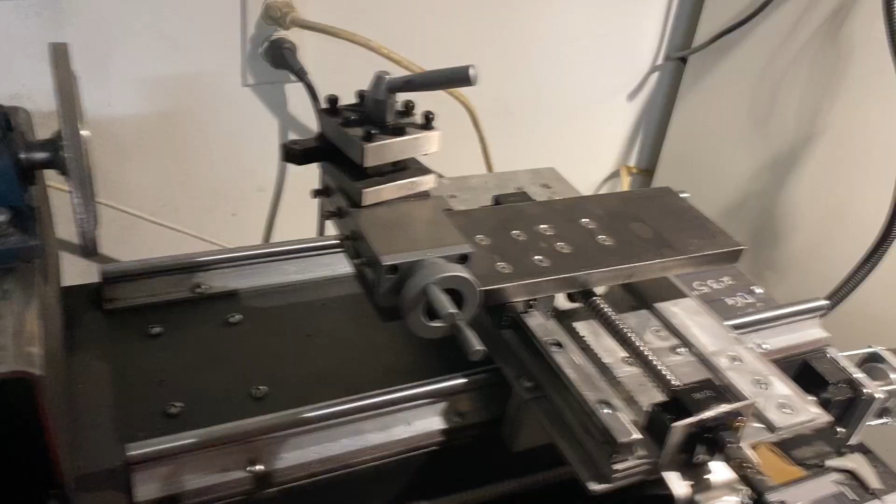Now, I'm also going to go over the components of the lathe just because I haven't done that before, so everybody can see what I've already done on it. Let's go ahead and switch this around so I can actually show everything related to the lathe.

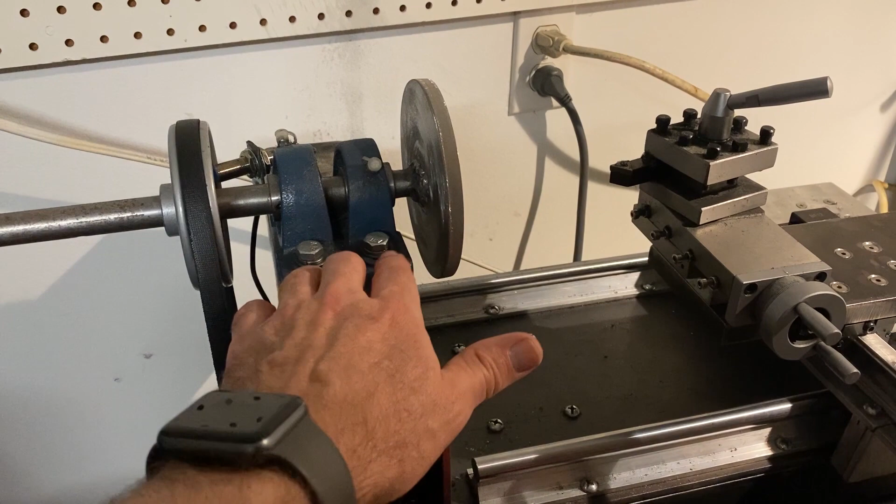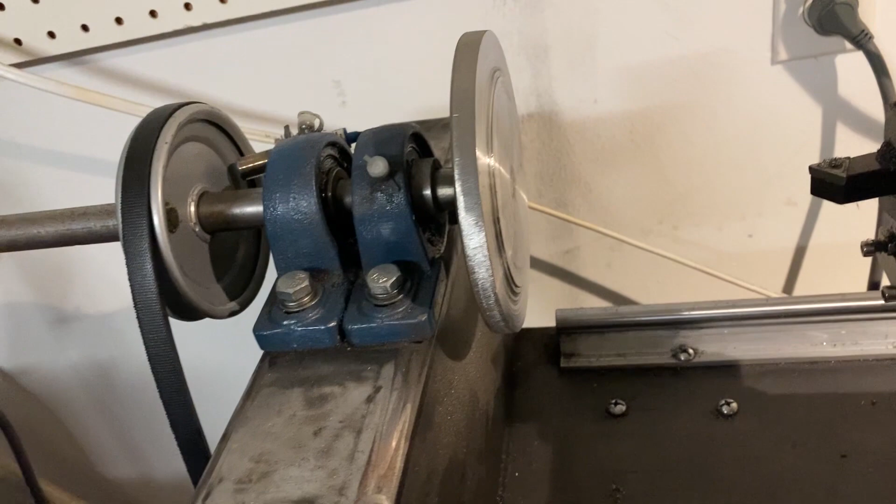So I've got the headstock here that I built, and I just used a piece of rectangular steel tube to put that on, along with two bushing bearings that are parallel to each other, a 3/4 inch rod, a pulley, and then a 5-inch disc that I'm still shaping into the back plate. I'm almost done with it though. I just stopped to work on the stuff related to the automation for the CNC.

So this was the first bracket I made. I'm actually going to replace this one. This one works okay, but it moves around a lot, and I like the other design better. So I'm going to go ahead and knock out two of the new design, which I'm about to show you guys, and we will go from there.

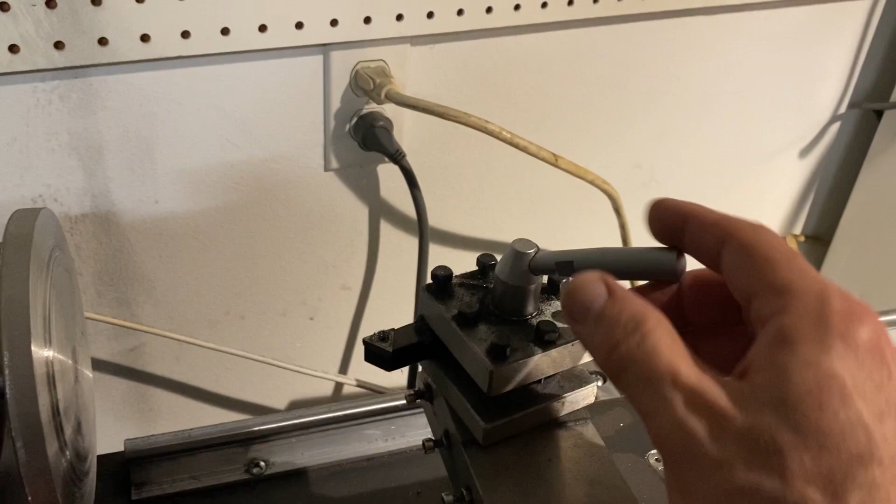And then as far as the top part goes, I bought the cross slide for the tool holder, but everything else I made on here. I just used a piece of plate steel, cold rolled, for this. I still need to finish it, so it's all going to come off and get painted. And then I used aluminum for my bottom sled, which obviously doesn't have to be painted.

The interesting thing is these rails here weren't the same height as the screw drive, even though I bought them in the same kit. So I ended up having to shim this up a couple pieces, which I did with some bar aluminum. Now, aluminum's not cheap, so getting something that actually fits would be better. But in this case, I didn't want to figure out what to do differently, so I just used some bar aluminum and shimmed it.

And then this side, I did the same thing to it. I didn't shim anything up, but I needed this extra piece put on here. This wasn't long enough when I first finished it up. I needed this extra piece so I could connect into the screw drive. So this was a mistake I made early on in design. I was able to fix it by putting a cantilever piece out that's screwed in. It's held on pretty darn well, held on by this piece and by these two pieces over here, and also supported by this huge steel bar that's right here as well. So I don't anticipate I'll ever run into issues with that.

It's all running on a sled that runs 24 inches long on these rails, and I got all this on Amazon. Later, when I post the overall video, I'll post all my parts list as well as what I purchased and how much it all costs. I don't know exactly how much it all was off the top of my head. It wasn't cheap, but it wasn't super expensive either, way less than buying one.

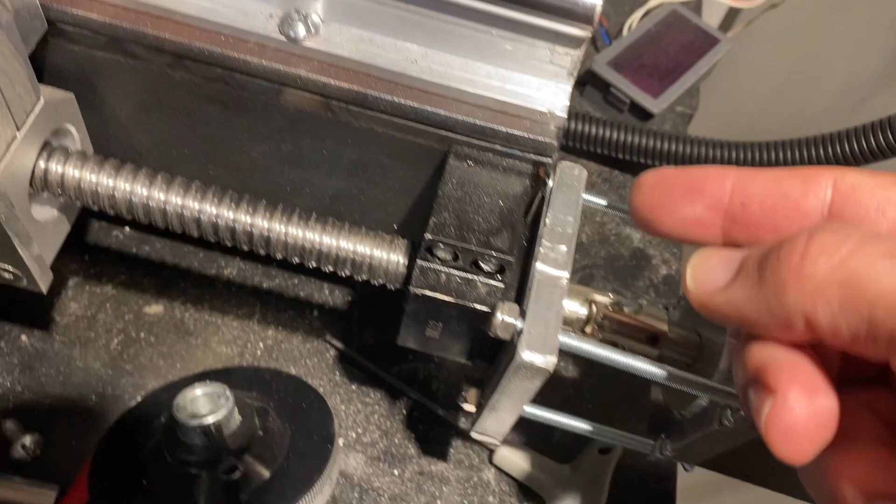So what I'm working on is this right here. This is obviously not going to work the way it is right here, but what I'm working on is this piece right here. I fabricated this piece yesterday. I originally made it in Adobe Illustrator and then used an Illustrator to G-code program to move it over. But this piece right here isn't going to work because there's not enough clearance here. So I'm actually going to make another one of these for this side, move this one over here, and this one is fine the way it is for over here. But for over here, it needs to be self-tapping because there's no clearance to work with, whereas on the other side, I have plenty of clearance to work with.

So this will move over to here, and then I'll build a new one of these using my mill. As you can see, there's a total of 8 holes in this, 9 actually if you include the center hole. Getting all these in here precision-wise without using some type of program isn't impossible, but my skill set is low, and using automated equipment such as CNC makes it easier for me.

Originally trying to figure out what I'm going to mount this to was one of the things, but inside of the screw drives there's a little bracket, and I made a drawing of it. It's a little square with 4 screws in the middle using M4 screws, so I used that as the mounting mechanism. But to do that, I have to create a pocket for that square to go into the aluminum I'm cutting.

I'm using half-inch aluminum square that I'm going to make into a square, and that needs a total of 9 holes put in it - 1 in the center, 4 around for the pocket, and then 4 for the actual NEMA 23 motor mount. So this is what it looks like in Adobe Illustrator.

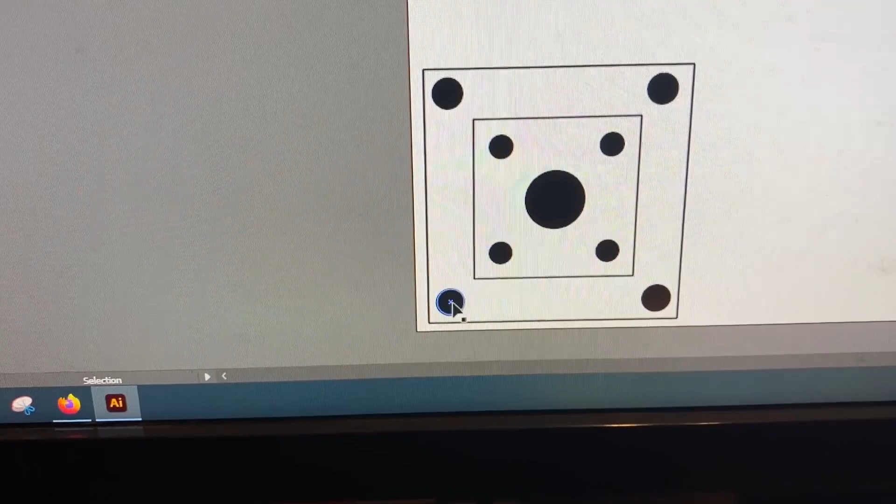So here it is in Adobe Illustrator. Not very interesting to just look at, so I'm going to go over quickly how I did it. It's a 60 millimeter square here, and these are centered on the edges. What I did originally is I made a box, another box, another box, and then a circle for the square. I'm not going to do exactly everything again, but just briefly.

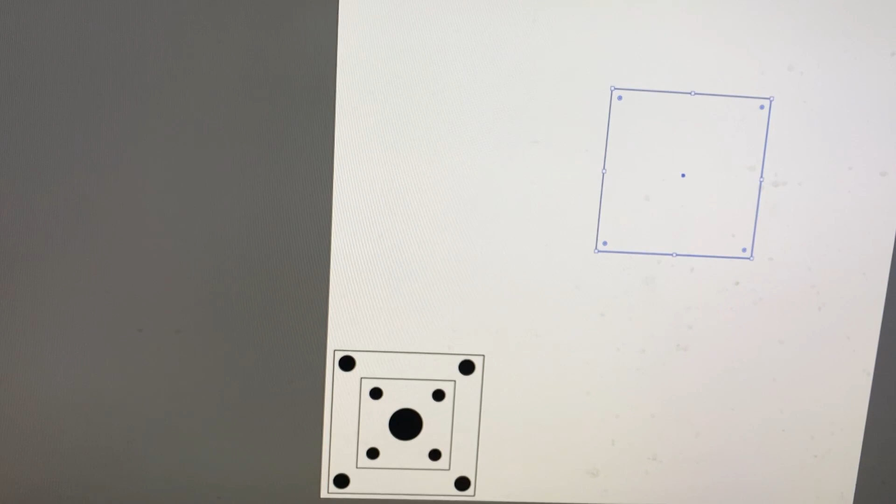When you take the square tool and click, it asks you how big you want it, and you can type in anything you want there. So if you want a 60 millimeter square, you just type in 60 millimeters by 60 millimeters, and it makes the box. As you can see here, if I grab the tool and bring this over, this box is 60 millimeters, or just under that - it looks like maybe 58 millimeters.

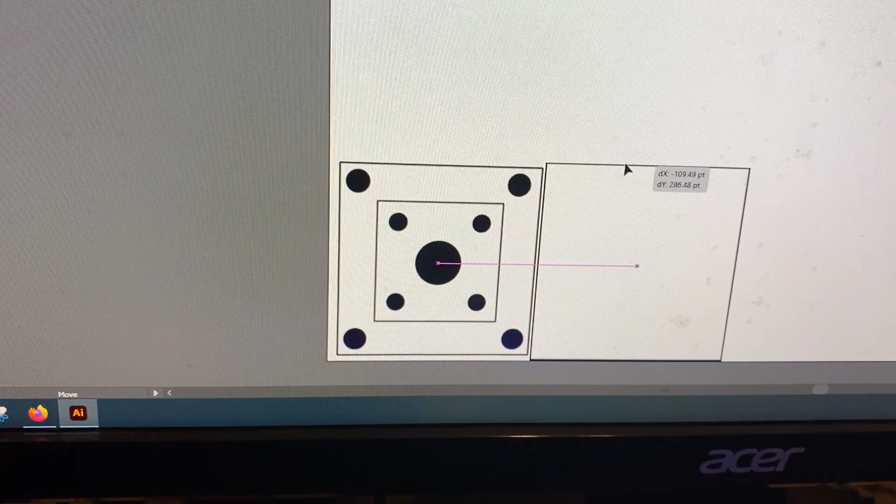But as it ends up, I need to actually make the box a little bigger on the next build, because the tool width - this is the outer dimension I need for the bracket or plate I'm building. When the tool comes in and cuts this, it actually cuts it too small, and I need it to be a little bigger. So I'm going to make it 64 millimeters - I'm not going to use this piece at all.

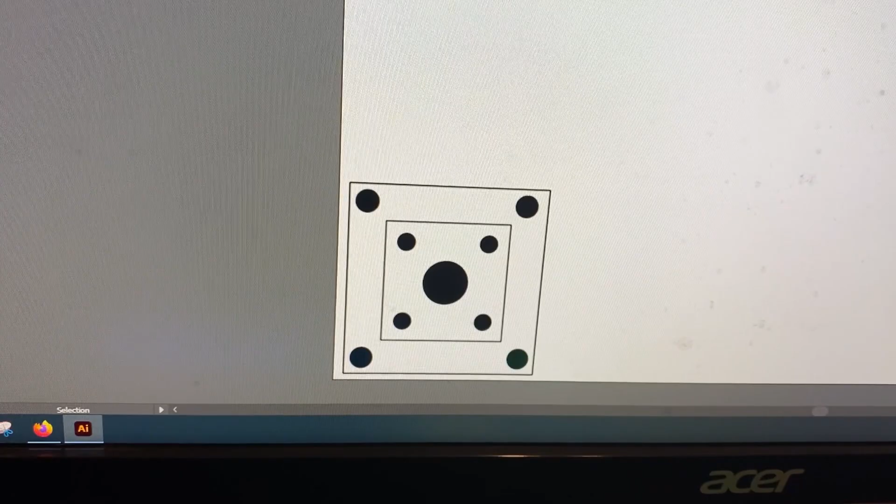I'm going to hit the box again and tell it to do a 64 millimeter - let's try that again - 64 millimeter by 64 millimeter. And then I'm going to take this and center it on that.

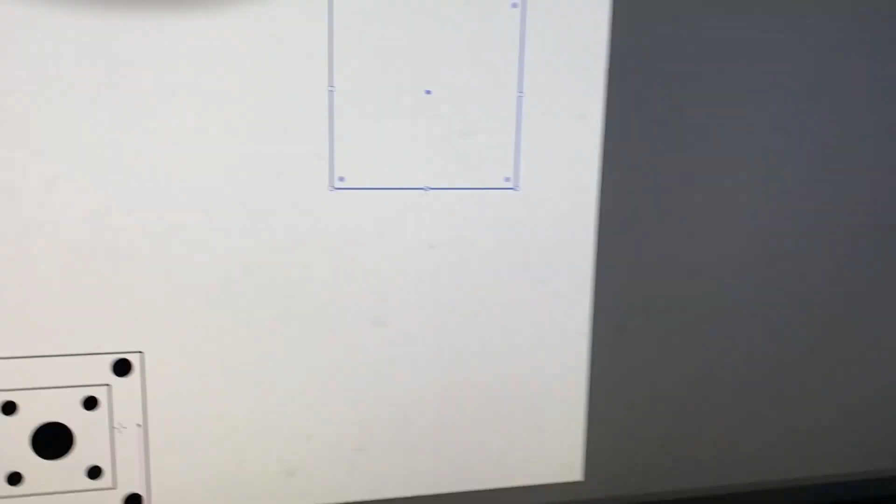Now, I'm not getting these holes cut completely for me - all it's doing is a scratch pass on this, getting all these holes marked. Then I'm going back with my drill press and actually drilling them. So I use the CNC machine to center them and not drill through completely, but then use a drill to finish them out on all of them, except for this one here, which I just used a half-inch 2-flute end mill to take.

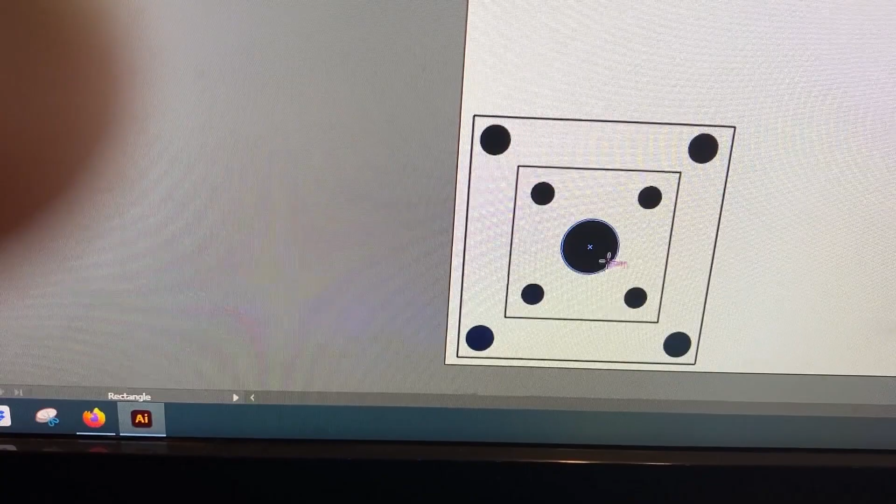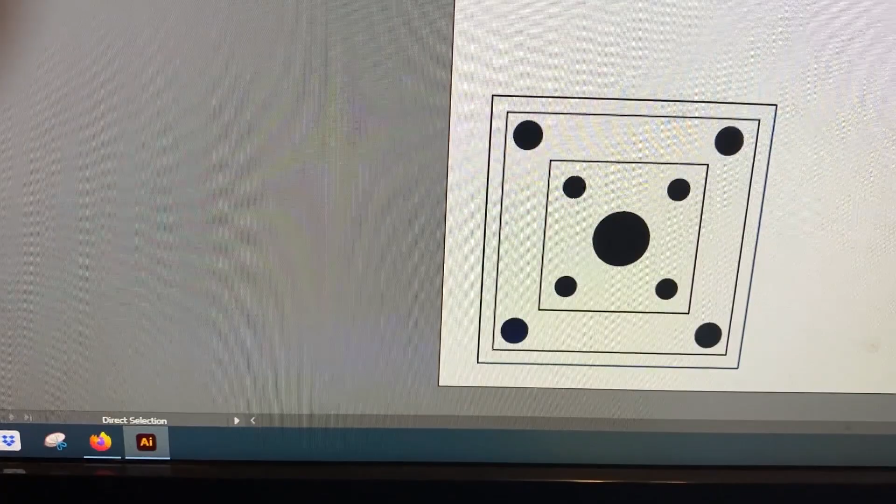So what I'm going to do here is just move this slightly over, and I do that by selecting it and holding down the arrow keys. I don't need to move it much. Then I'm going to take this one up here and move it down, and it's going to cover it up because of how Illustrator works. But I'm just going to go to transform, arrange - I'm sorry - and say send it to back. Now it's in the very back of everything, and it looks like I put it right dead in the center where it needs to be.

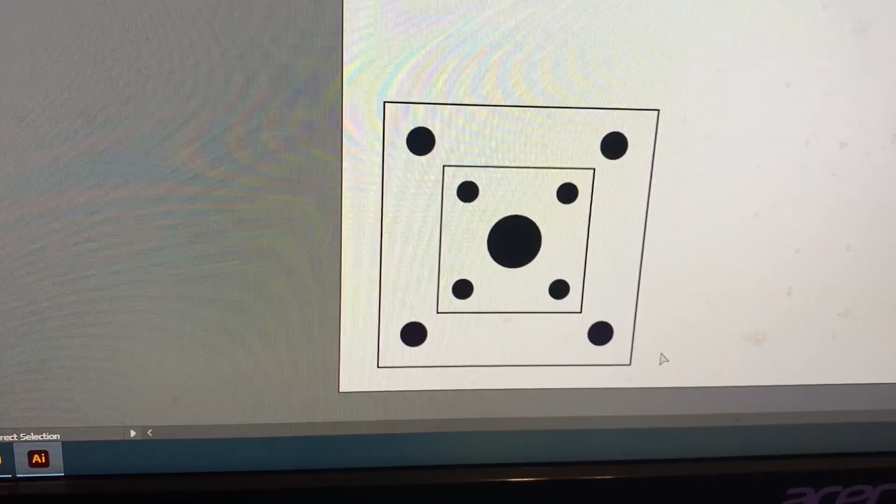So now I need to get rid of this one, because I don't want it to make that line on the CNC. So just by selecting it and erasing it, I can do that. Now when this comes in and cuts, my tool width can be up to about 6 millimeters bigger than the actual width of it. The size of this is not super important - if it's 60 millimeters or 62 millimeters or 59 millimeters, it's fine.

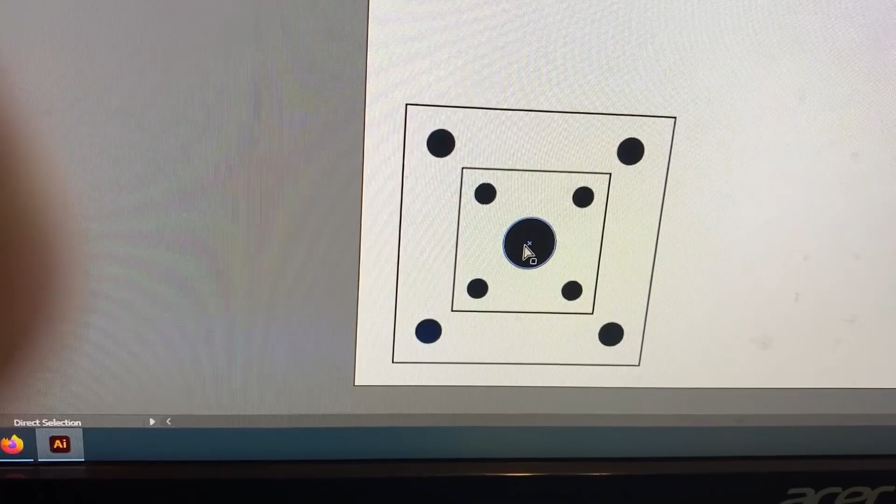The main thing is that these holes have to be in the exact right place, otherwise the motor's not going to mount. And these have to be in the right place, otherwise those holes aren't going to match where they need to be. And this needs to be in the right place, otherwise it's not going to allow enough room for the screw drive to get through.

Okay, so I'm using a script for this, and so for the script, I'm just going to come down here to scripts, and I'm going to go export to GCODE version 5. It just comes up with a screen here, and it basically asks you what you want it to do.

Now, I had the feed rate for the tool at 20 and the seek rate at 200. And what I found is that some of the cutting is going at 200. So what I'm going to do is 50 works for both just fine. And so I'm going to change both of those to 50 and call it even.

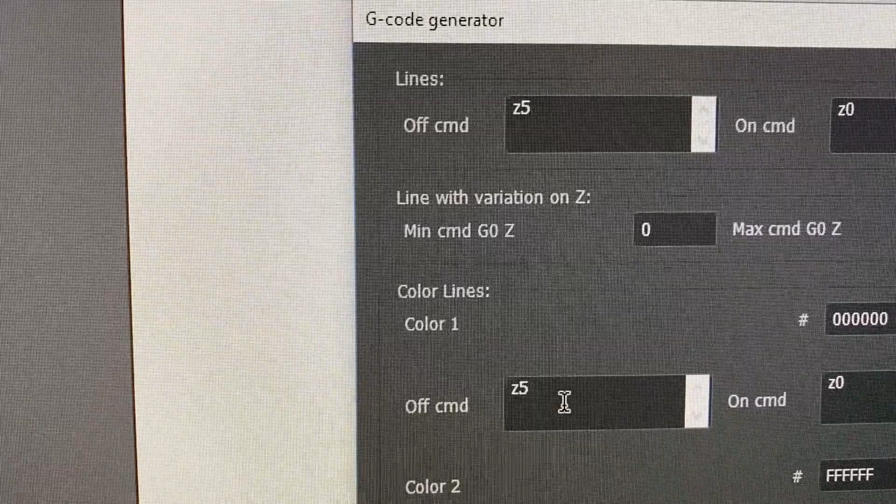I'm going to go ahead and save those settings, and that's what we're going to do there. And then as far as the G-code off and on commands, I have those as 5 and 0, and so that's where we're going to set those.

Now you have to put colors in for this. Obviously I don't have any colors, but I used 0 and F, and then I made up a third color. And then you just hit generate G-code, and then it'll generate the code. Oh, it's done actually. That was pretty quick, and it's in a test folder.

So let's go to that, and let's see what we got here. Yep, it's the third one here, and I want to open that with a text editor. WordPad's fine. And you can see here it generated the G-code for me. Anyway, so we'll run this.

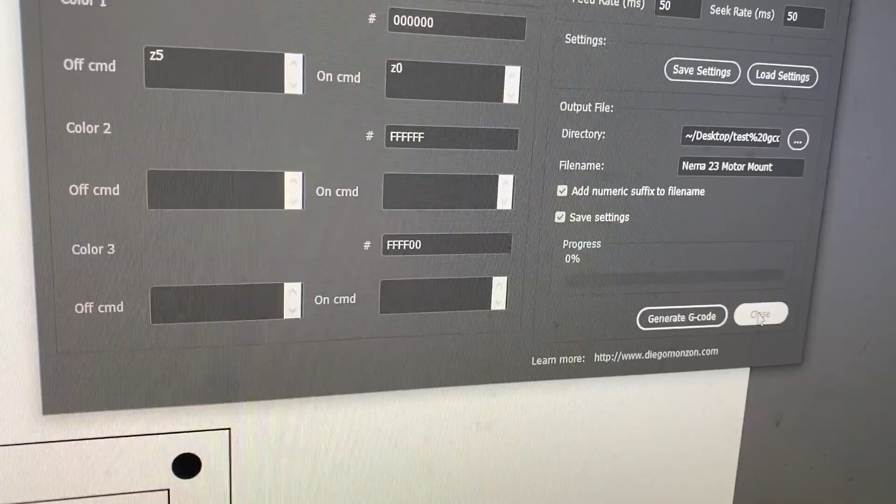Now, one of the things I do like to do with these files is go ahead and try them out on a simulator, and there's plenty available online to do that with. But if you just search G-code simulator, and the one I've been using is this one here.

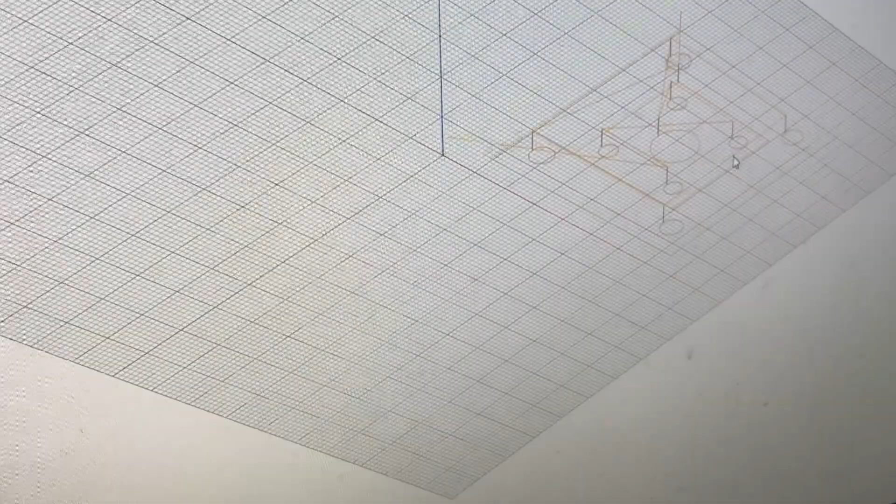I like the way it works. It's easy to use. You just come up here and click the open on it. You go to your test G-code file and go to the NEMA 23 motor mount 3, which is the one I just did. And you can see here when you zoom out, it's got it set up right here on the edge. Now, it's hard to see, but it's there.

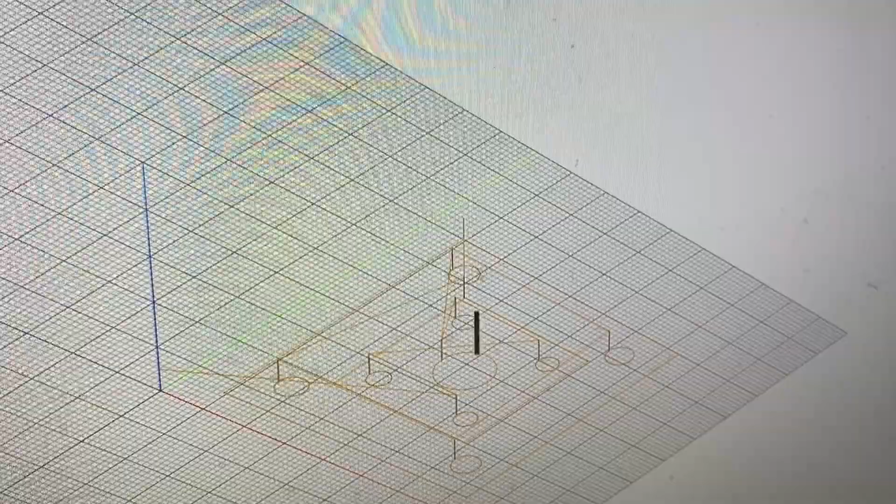And then you can just come over here and click the play button, and it's going to walk through it. And so it goes through everything. So just by watching this run, you can see that it's going to cut the job out on the CNC machine just fine. And so that is done. It takes way longer to actually cut it into metal, but we know it's going to work because of that.

So here I am in the workshop, and I'm getting ready to start off on building the piece on the CNC machine. So inevitably, when I designed this, I originally tried to make this where I could get 2 of these out of this one sheet. And I was hoping I could do that, but I couldn't actually get that. I ended up with this leftover, which, as you can see, is less than half of that's available.

So I'll have to save this, obviously. It's still an expensive piece of aluminum, it's 1/2 inch, and there's probably something I can make out of it later. I just don't have anything to make out of it right now. So that's one of the things that was a little bit frustrating when I designed this. I was hoping to get 2 out of it, just based on the size and measurements that I was going to need. But I underestimated that, and that was not the case. I couldn't get that out.

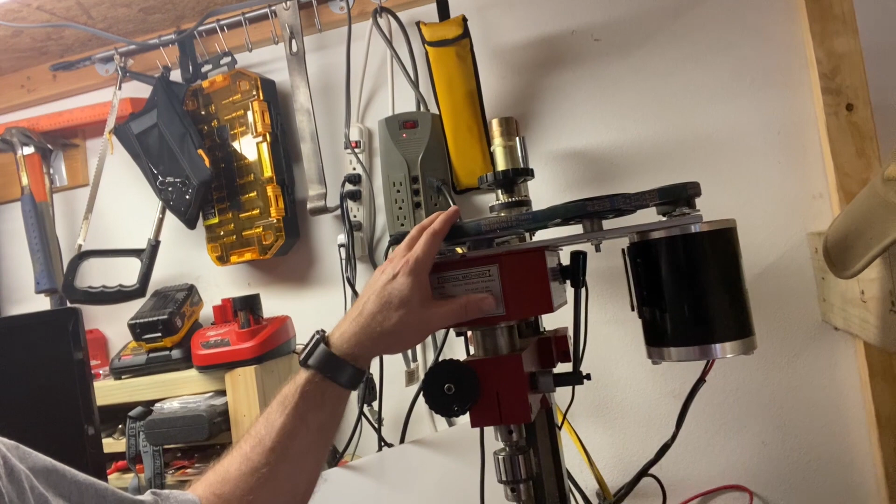So we're going to be using the CNC machine to do this with. And so what's interesting about this is a Harbor Freight mini mill. And I've upgraded this - there's a video on what I did here. But I basically thought I didn't have enough power, so I went and upgraded to a 3/4 horsepower motor, about 500 watts. And it's been amazingly better.

Right now I've got a little 1/2 inch 2-flute end mill on that. I need to take that out, and I'm going to put in a 1/8 inch end mill for the cutting we're about to do.

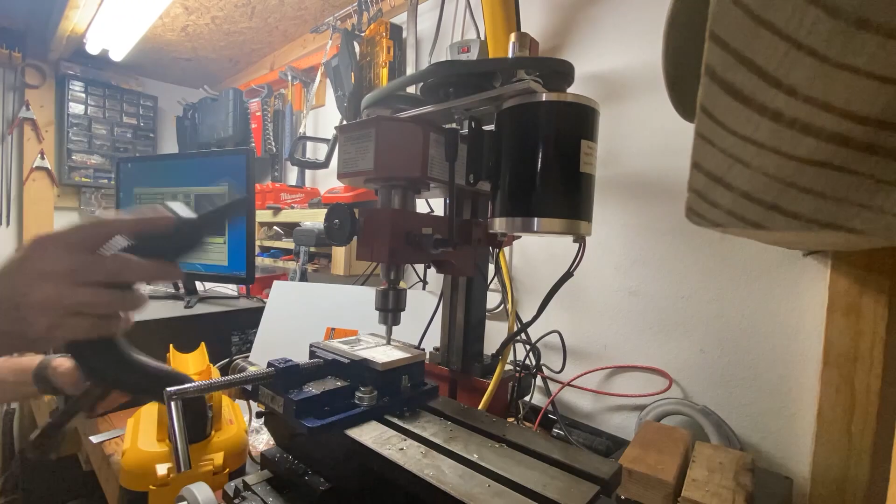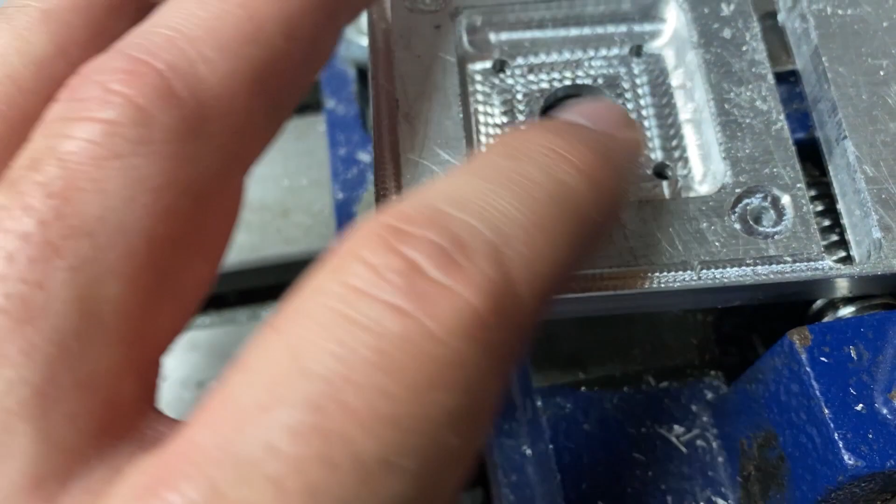I actually wrote the G-code to do this pocket. What I did is I started at 0 here in the corner, and did over here to this point, and then down to this point as well. Obviously this is square, so the X and the Y are exactly the same, but I went ahead and measured them just to make sure, and they were, so that's all good.

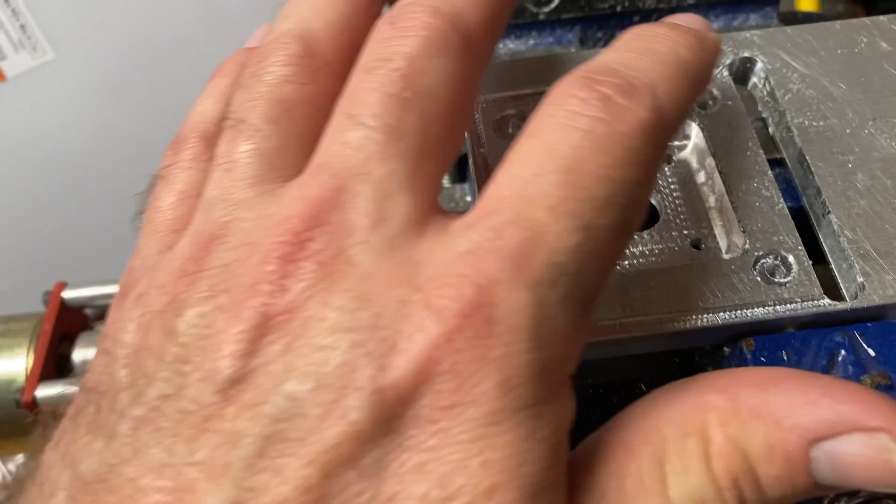Also, I drilled a hole through here manually as well. But all the downward hole movements you see, those were all manual. The carving of this pocket was G-code that I wrote while y'all were watching on the time lapse, and then this was manual as well. I did that last pass manually.

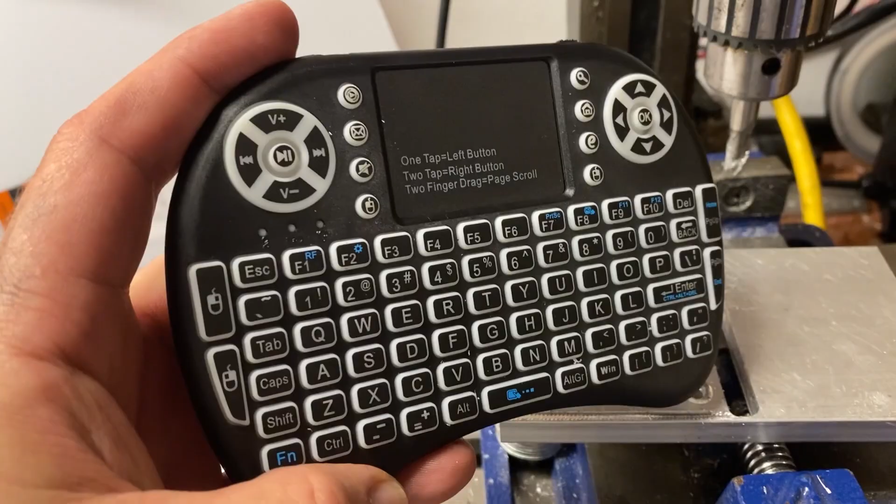Anyway, this keyboard that I was using during the thing, it's just an $11, $12 keyboard from Amazon. I'll include a link to it. I really like it a lot. It just has a little dongle there that comes inside the battery compartment. Doesn't use any standard batteries, it has a rechargeable one. So I don't know how long that's going to last, but so far I've been really happy with it.

To move the axes, I just use this, and to move the Z axis up and down, I use these two buttons.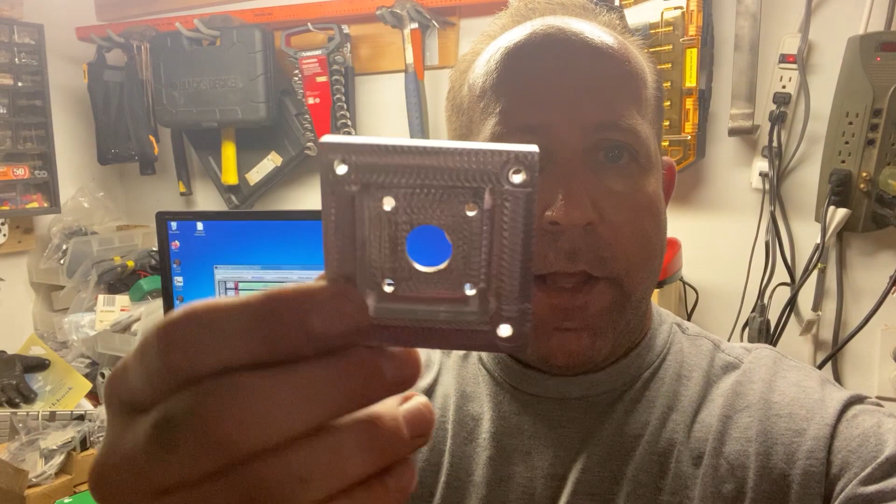So we finished up the piece, and as you can see, it turned out really nice. Looks just like the Adobe Illustrator file that I had made. It is going to be able to be used on the camera mount.

This was all done by Adobe Illustrator and then the G-code conversion, except for this pocket and the drill through holes as well. And then of course the final trim I did manually as well. I did do some finish passes over it to make it look nicer, but those are not necessary, but it definitely makes it look nicer.

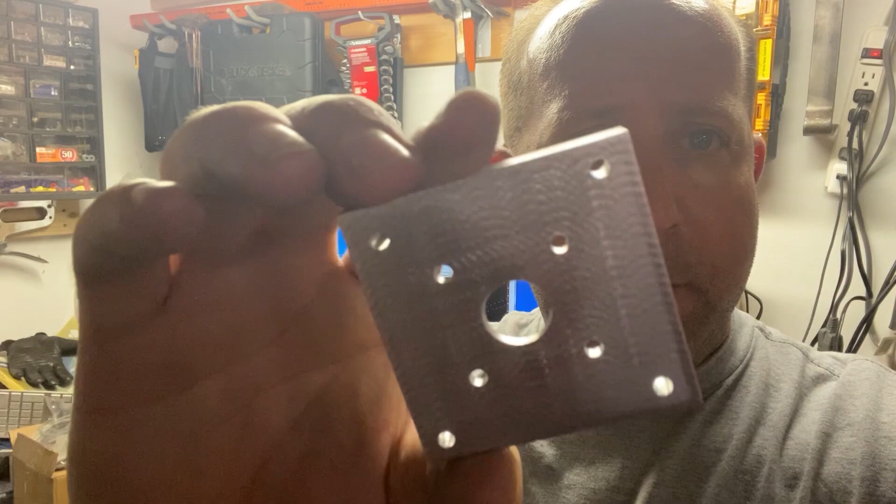And then I took a bench grinder wire brush to the back just to get off some of the sharp edges and make it smooth. But as you can see, the piece turned out really well.

The time lapse is deceptive. This did take a couple hours to make. Anyway, I hope this was helpful.

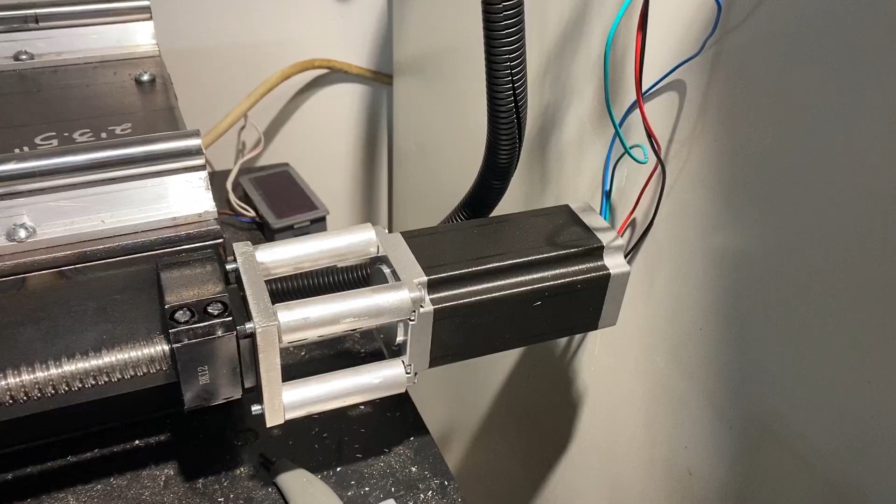And voila, or voila, as it's properly pronounced. There is the motor mount and the plate that we made earlier. And then the coupler, and then I used these aluminum tubes, which are very beefy, to provide support. Anyway, super sturdy, and as you can see, it's working very well in controlling the Z-axis.

I took off the old bracket for the X, and I'm going to put that one on as well. And this is the LinuxCNC that I'm using to run this with.

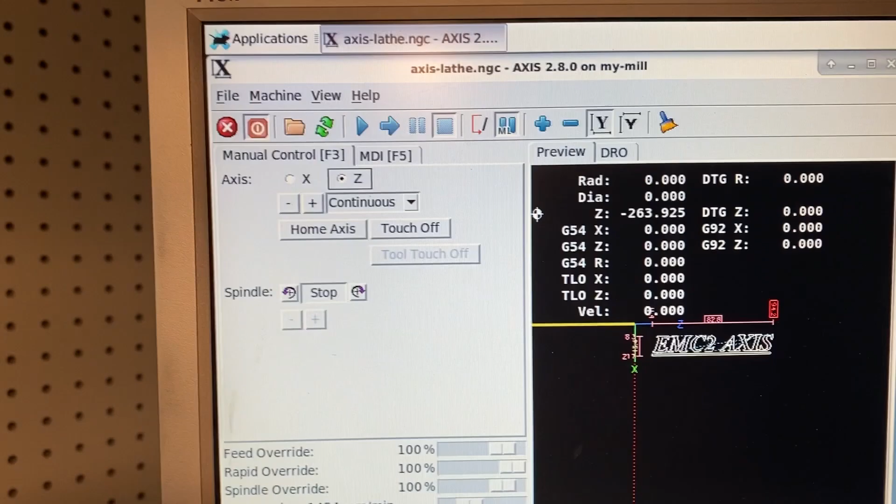So here's the second one. I cleaned up the second motor mount quite a bit. I trimmed the edges on it, and then also deepened the pocket so it matched the other one. So now I just need to cut the supports for it and measure it up. I'll measure those, cut them to length, and then install the other NEMA 23 stepper motor.

So I finished up, and now the motor mounts are completed, and the NEMA 23 high torque motors are all attached up to the lathe. Next step is going to be to finish this back plate and then put the chuck on, and so we'll get busy started to do that. Now that I have these stepper motors on, I'll actually write some G-code to finish that up for me.